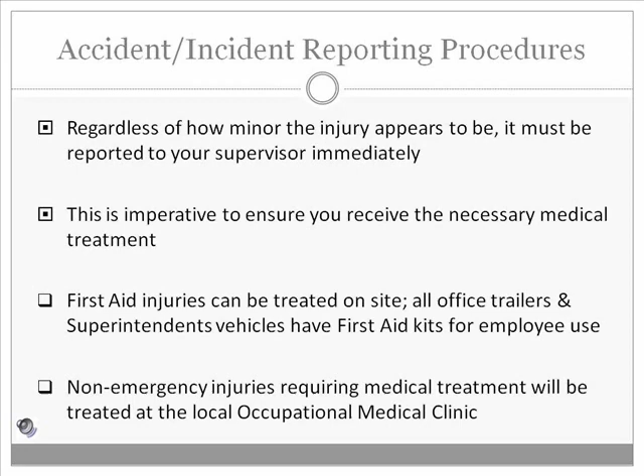Our drug and alcohol policy includes testing for pre-employment, post-accident, and reasonable suspicion. Violation of this policy may result in disciplinary action up to and including termination. Employees are prohibited from unlawfully manufacturing, distributing, dispensing, possessing, or using alcohol or controlled substances. This includes the misuse or abuse of prescription drugs. If the drugs are prescribed to someone other than you, they are viewed the same way as illegal narcotics.

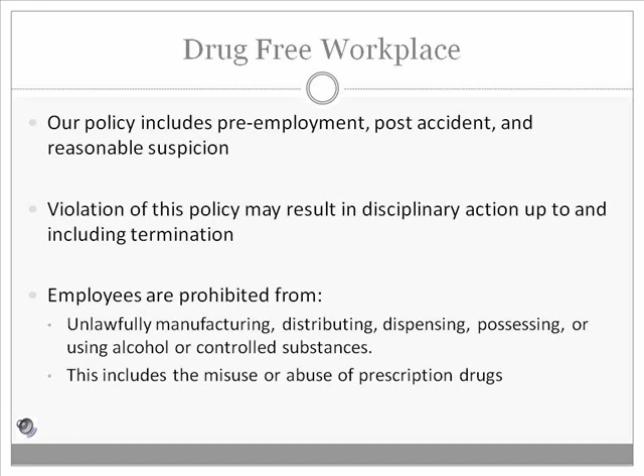Hard hats must be worn 100% of the time. The only exception to this is while you are inside the enclosed cab of equipment or inside a vehicle. The company-issued hard hat shall be worn. This will be issued to you on your first day of employment.

Do not alter the hard hat in any way. Hard hats are good for 5 years. The manufacturer's date can be found under the brim. Hard hat liners are good for 2 years and need to be inspected for damage or wear.

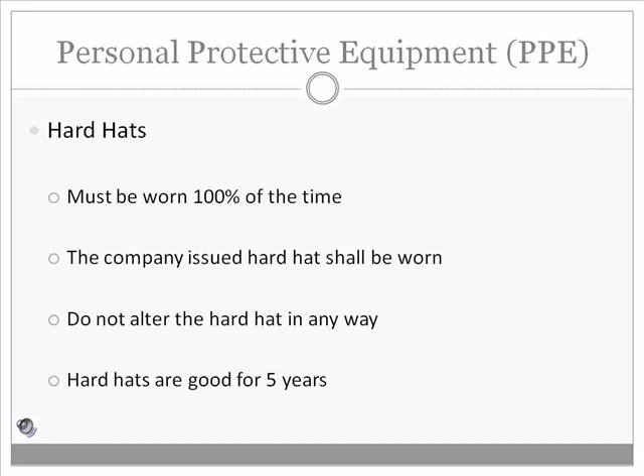Using the hollow space in the hard hat to store items is strictly prohibited, as well as extremely dangerous. This air gap is there to absorb the impact, and by putting something in that space, the protection of the hard hat is minimized. Wearing of baseball caps with buttons in the top or pins on it is also prohibited, as the pin will cause harm if the hard hat takes an impact.

Dust masks are provided for voluntary use as according to OSHA's Appendix D. Make sure to follow all provided manufacturer's instructions on how to use the masks. Keep clean and store properly. Dust masks are the only item we allow to be stored in the air gap or hollow space of the hard hats. This is because it keeps the masks clean and doesn't affect the hard hat's functionality. Dispose of masks when they are dirty, as they no longer stop particles and can affect airflow for breathing.

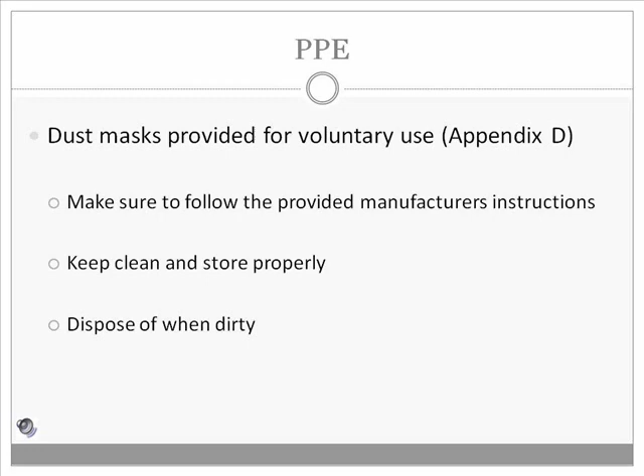Noise exposure over 85 decibels requires hearing protection. This is the level above which prolonged exposure will permanently damage your hearing. Most of the tools and equipment present on the sites operate at a volume of over 85 decibels. So hearing protection is recommended when working with or around equipment and machinery.

Employees are required to wear an over-the-ankle leather work boot. Some clients require hard-toe boots, depending on the job. We also require employees to wear long pants and a shirt with a sleeve of at least 4 inches. Save your shorts for the beach.

Safety glasses must be worn at all times when a hazard is present. Many people end up with objects in their eye simply by being near tools when they're being used, even if they aren't using the tools themselves.

Dark lenses are not to be worn inside of buildings or when dark. All eyewear must be Z87 approved, including prescription glasses. Z87 is the minimum protective standard required by OSHA. Side shields must be used with prescription glasses. In place of this, you must wear over-the-glasses glasses. If cutting or grinding, safety glasses must be used in addition to a safety face shield or a similar layer of protection.

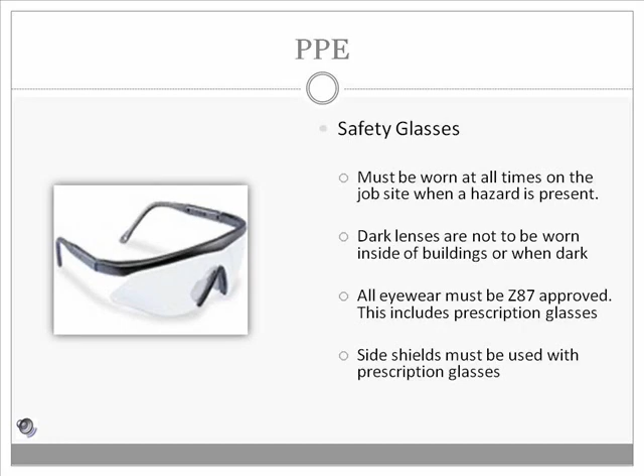Gloves are to be worn when handling materials. It is important to select the proper glove for the job being performed. We provide a variety of gloves for different purposes, such as rubber gloves for use with concrete and leather gloves for handling materials.

While performing hot work, a fire extinguisher must be readily accessible. Inspect the fire extinguisher before use. All our fire extinguishers are ABC type extinguishers, so they are useful for a variety of fires. This means you are able to use any extinguisher accessible rather than having to search for the right type. If the fire is too large to handle yourself, sound the alarm and evacuate the area immediately.

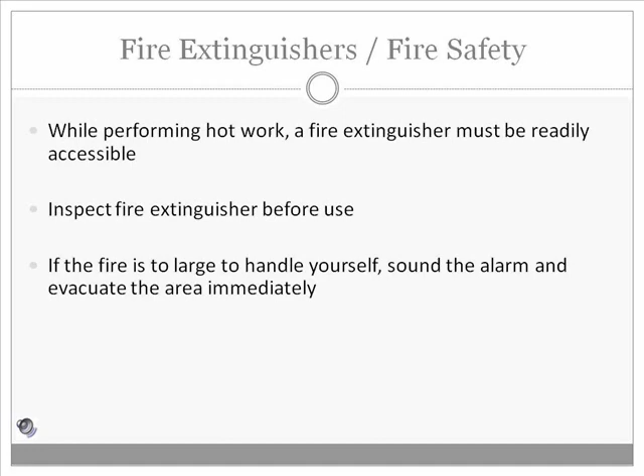Ensure the fire extinguisher has been inspected. Verify it has been inspected for the current month and is documented on the tag. Verify the pin is in place and the extinguisher has a full charge. Also, turn the extinguisher upside down and check to see if contents shift around. This ensures the contents aren't compacted at the bottom. If contents are compacted at the bottom, take a rubber mallet and tap the bottom of the extinguisher to loosen the contents.

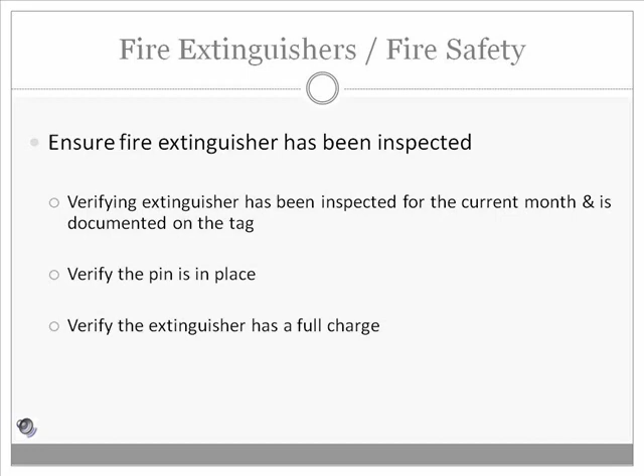We advise the use of the PASS technique: pull the pin, aim the nozzle, squeeze the handle, sweep the base of the fire. The reason for sweeping the base is to suffocate the fire by removing the oxygen. Without access to oxygen, the fire will die.

We follow a color coding system for our monthly inspections. This color code is used for ladders, both metal and fiberglass, power tools including cords and generators, fall protection, and lifting devices. All items need to be inspected daily as well as by those working with them, but monthly they need to be inspected and given the color for that month.

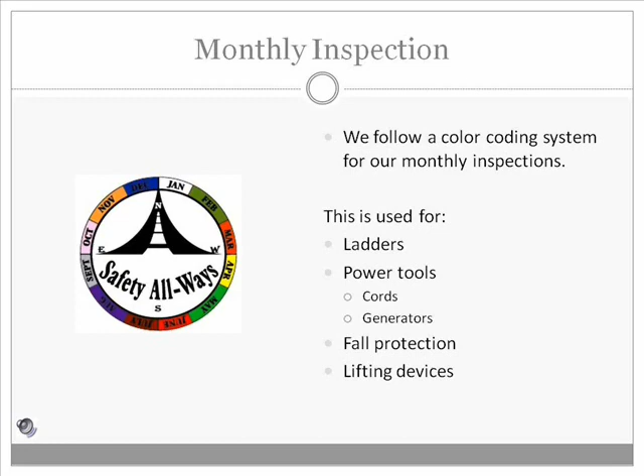Never join two ladders together to make a longer ladder. Check weight limitations of the ladder prior to use. Keep shoes free of mud and grease. Never hand carry materials or tools up a ladder; use a tag line to hoist them up. On equipment, place items on the step or fender above the ladder and then climb up. You must be able to maintain 3 points of contact at all times, including on ladders on equipment.

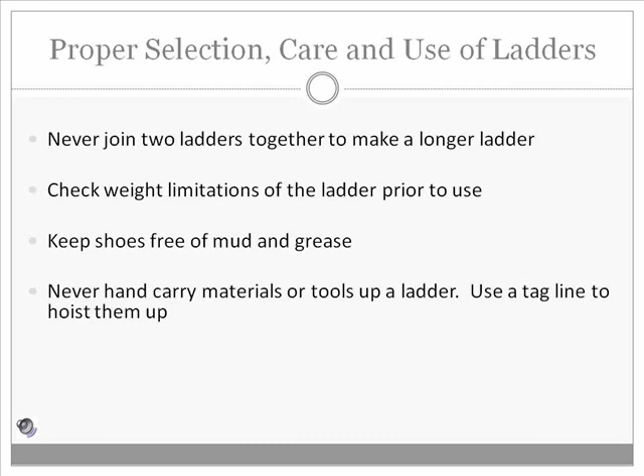Only one person at a time may work from a single ladder, unless it is designed otherwise. Inspect the ladder prior to use, and do not use an extension or step ladder if there is a missing, weakened, broken, or otherwise defective part. Tag it out of service and remove it from the work area. Metal and fiberglass ladders must be inspected and color-coded before being used. Wood ladders need to be inspected daily. Use caution when ladders are used in high-traffic areas.

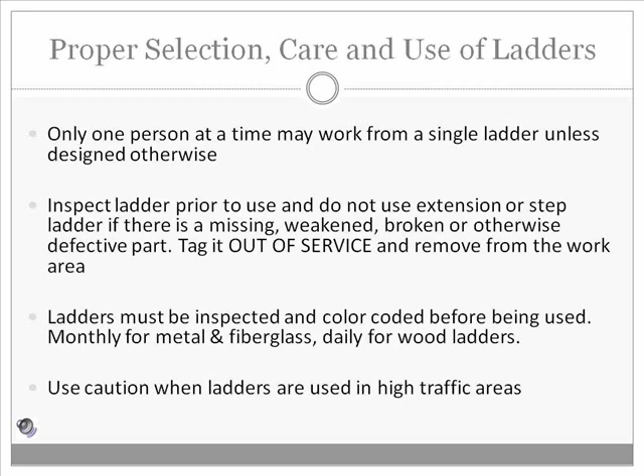Do not climb the back section of a step ladder. Keep the area around the base of the ladder free of clutter and materials. Step ladders shall not be used when leaned up against an object; the ladder must be completely opened up. Do not stand or sit on the top or the second rung of a step ladder.

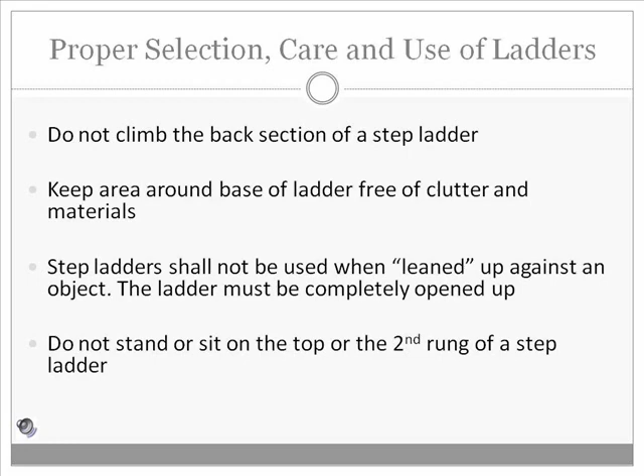Step ladders should be fully opened and the cross braces locked in place. Do not stand on top or next to the top rung. Do not walk ladders; climb down and move them to their new position. Walking ladders can warp the frame and reduce the structural integrity and weight capacity of the ladder.

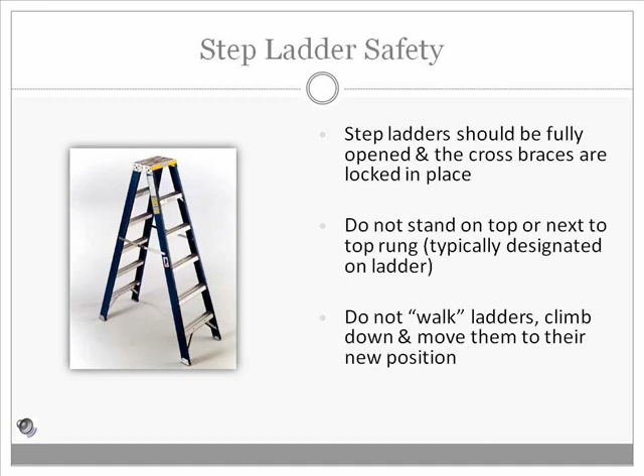Set up extension ladders at a 4-to-1 rise to run angle. If the wall is 20 feet high, the bottom of the ladder needs to be 5 feet out from the base of the wall. Secure ladders at the top and bottom. If the ladder is in a trench, bracing the base against the other wall of the trench is acceptable as securing it. The top of the ladder should extend a minimum of 3 feet above the ladder's landing.

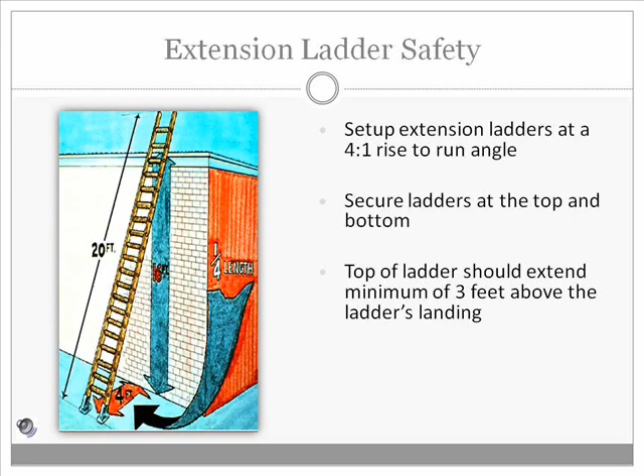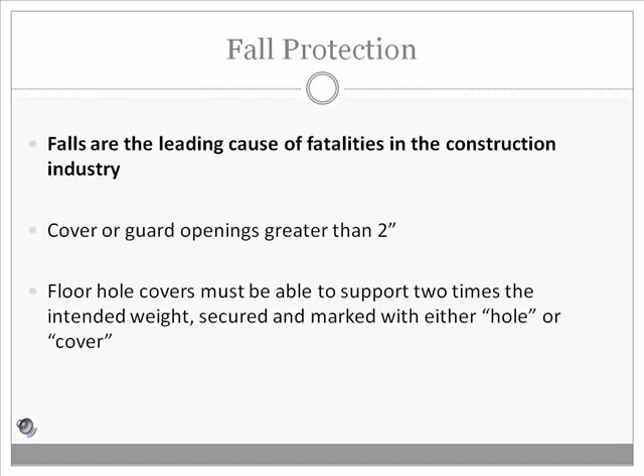Falls are the leading cause of fatalities in the construction industry. Cover or guard openings greater than 2 inches. Floor hole covers must be able to support 2 times the intended weight, secured and marked with either 'hole' or 'cover'.

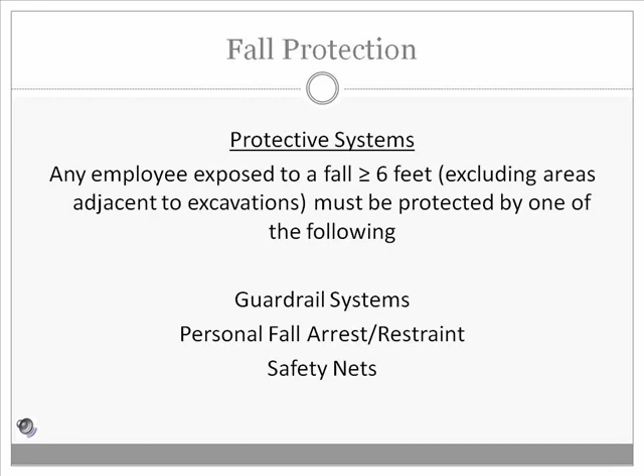Any employee exposed to a fall greater than 6 feet must be protected by one of the following: guardrail systems, personal fall arrest or restraint systems, or safety nets.

Inspect systems monthly and before each use for wear, damage, and other deterioration. Must have monthly color coding to show inspection has been completed. Remove systems and components from service immediately if they are defective or have been subjected to a fall impact.

Do not attach fall arrest systems to guardrail systems or hoists. These are not designed to support the force generated by a fall. In general, it is much better to use fall prevention systems such as guardrails than fall protection systems such as fall arrest devices, because they provide more positive safety means.

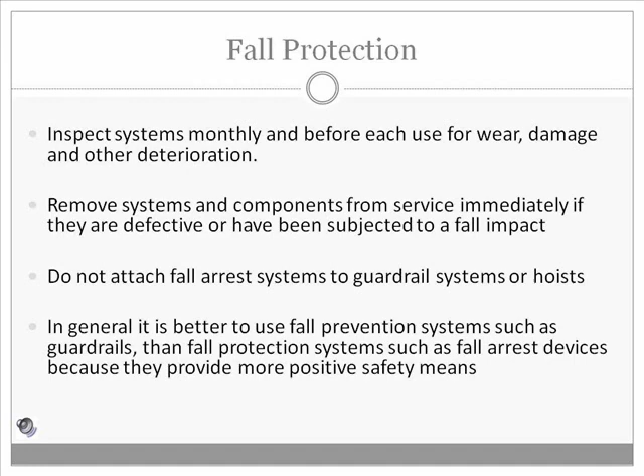Anchorage points must be independent of an anchorage that is also being used to support or suspend a platform, and must be capable of supporting at least 5,000 pounds per employee.

When using a lanyard, retractable, or restraint, always choose an anchorage point overhead. Check manufacturer specifications as to whether or not a lanyard is a tie-back lanyard. If it is not made specifically for use as a tie-back lanyard, do not attempt to use it as one under any circumstance.

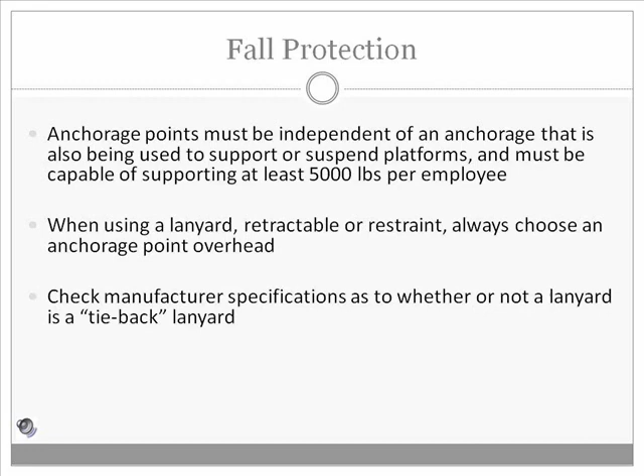Typical components of a fall arrest system are: body harness, a lanyard or vertical lifeline which must be shock absorbing, dual-legged lanyard to ensure 100% tie-off, a retractable lifeline or yo-yo, a horizontal lifeline which must be engineered, or restraints.

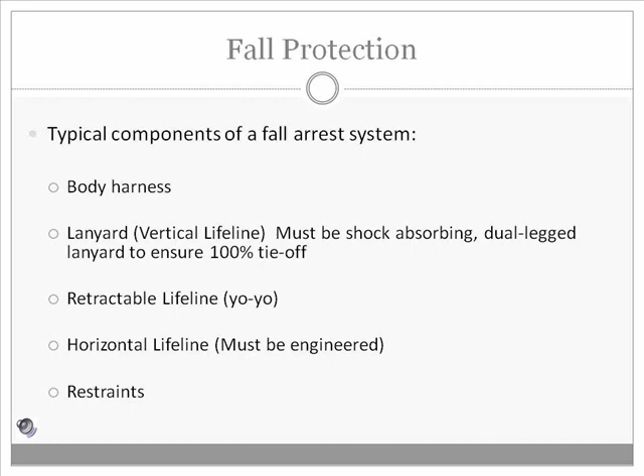This illustration shows the distance a person would fall if they were tied off above their head with a 6-foot lanyard. When you add the lanyard length to the length of the deceleration device, the distance from the D-ring to the worker's feet, and add some stretch factor, the distance the worker will fall is almost 18 feet.

This is important to consider when many of the heights employees work at are less than 18 feet, but over the 6-foot minimum that requires fall protection. This situation would require other types of fall protection, such as retractable fall protection or yo-yos.

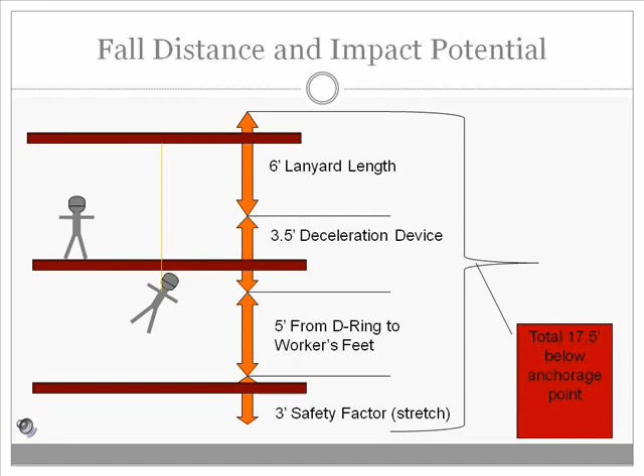Back injuries are one of the leading injuries in the construction industry, and most of them are easily preventable by using proper planning and techniques. It is important to remember to never lift items that are too heavy, to always get help, and have a plan before you lift.

The proper positioning and technique that will save you from back injury is as follows: keep your knees bent and your back straight, keep the load close, and do not twist.

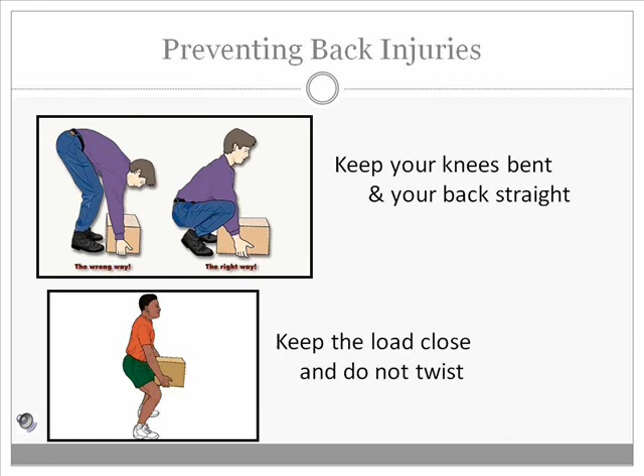Rather than putting stress on your back, use mechanical lifting devices when possible. Examples of lifting devices are hoists, cranes, hand truck, come-along, and forklift.

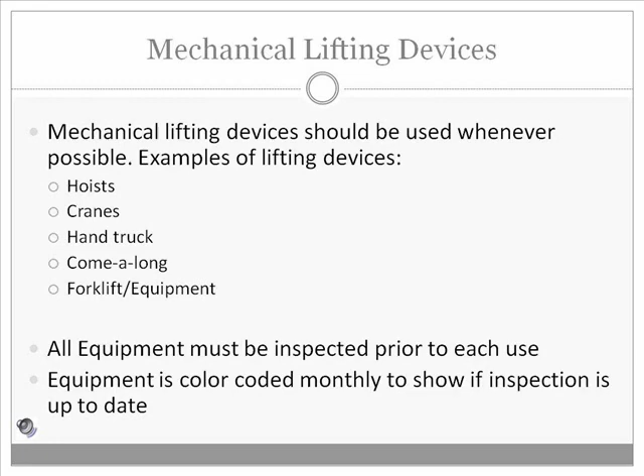All equipment must be inspected prior to each use. Equipment is color-coded monthly to show inspection is up to date. Inspect all tools monthly and prior to use. Tools cannot be used if they have not been inspected and color-coded for that month.

Tag out damaged and faulty electrical equipment and remove it from service immediately. Only use GFCI protected electrical sources on construction sites. Tools without a ground plug must be double insulated.

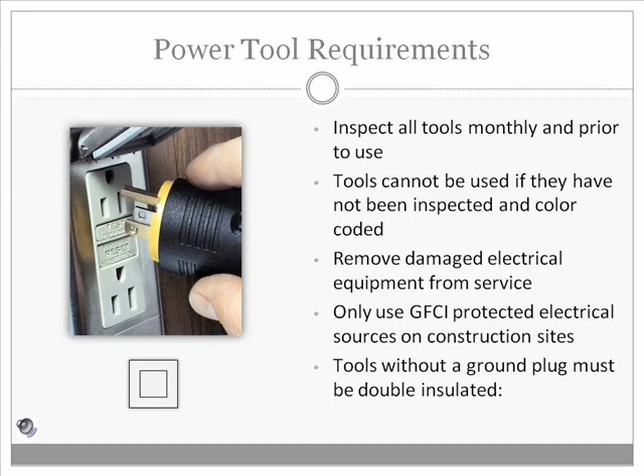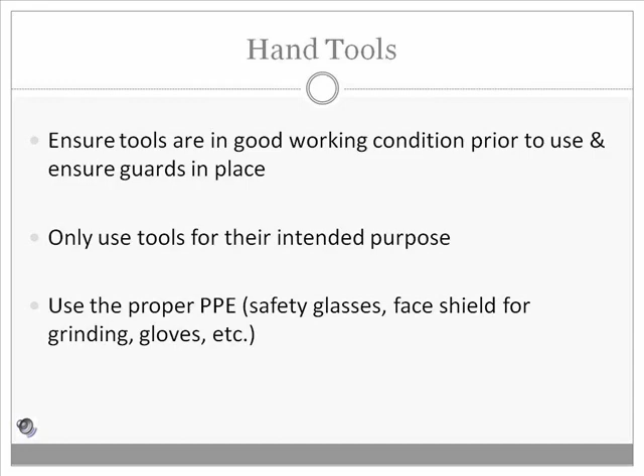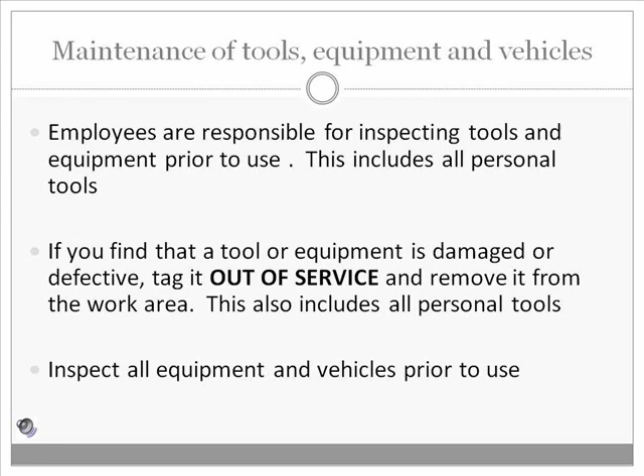All equipment and vehicles must be inspected prior to use. Many injuries occur due to poor housekeeping. To prevent this, employees must clean up their work area as the day progresses. Protect yourself and others by keeping a neat and organized work area. A clean work site is a safe work site.

The following areas need to remain free from obstruction: aisles, exits, fire extinguishers, emergency equipment, and all electrical controls and switches.

Only use properly rated rigging equipment. In the case of chains, only grade 80 and grade 100 are to be used for lifting. Anything less is a transport chain, useful only for tying things down, not for lifting.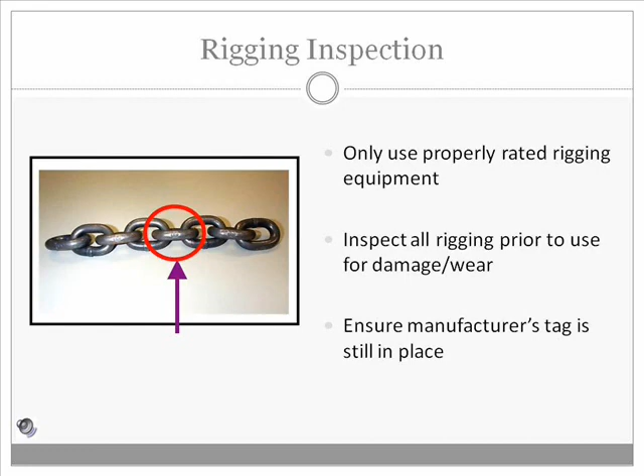Inspect all rigging prior to use for damage or wear. Look for cracked, stretched, or bent links on chains. Ensure the manufacturer's tag is still in place. If rigging equipment is damaged or faulty, or if the manufacturer's tag is gone, remove it from service immediately.

In the case of synthetic or nylon slings, look for acid or caustic burns, melting or charring of any part, snags, punctures, tears, or cuts, broken or worn stitches, and distortion of fittings. If any of these are present, remove the sling from service.

When using slings, protect from sharp edges of the load by placing pads over the sharp edges, and do not place your hands between the sling and its load when the sling is being tightened around the load. When rigging with a synthetic sling, always put the tag towards the hook so the tag can still be read.

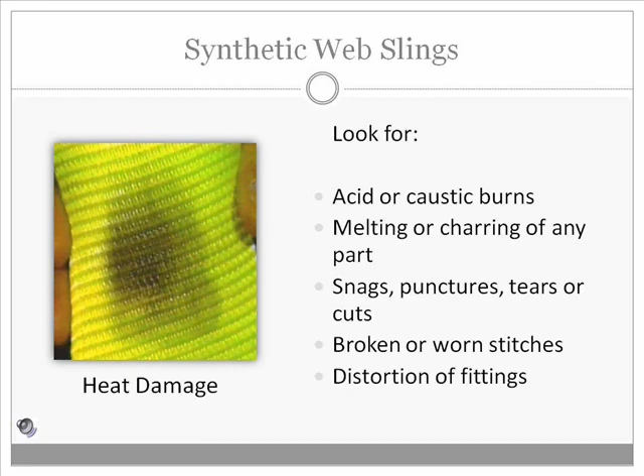It is your right to know what chemicals or materials you are working with. The purpose of HAZCOM is to prevent the occurrence of work-related illnesses and injuries caused by chemicals. It is your right to know of any hazardous chemicals or materials that you are working with or around. You should know the location of the Material Safety Data Sheet, MSDS, book, and the written HAZCOM program. All of the job site trailers contain MSDS books and the information for 3E Company, the third-party MSDS provider.

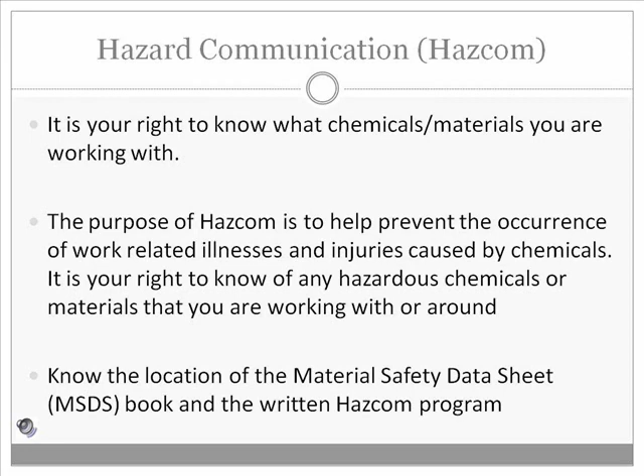MSDS sheets are documents provided by the supplier of a chemical, and they contain manufacturing company information, hazardous ingredients, physical data, fire and explosion data, health hazard information, reactivity data, spill, leak, and disposal procedures, special protection information or PPE, and special precautions.

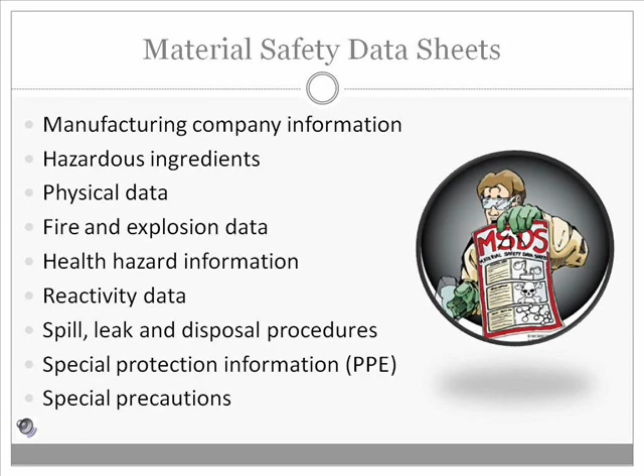The other part of the HAZCOM program is that all containers must be labeled. All chemical containers must be labeled to identify contents and hazards. Most labels use colors to represent the type of hazard posed by the contents of the container, and numbers to indicate the level of hazard.

Fire has a red color, health has a blue color, reactivity has a yellow color. The number is used to indicate the degree of hazard, ranging from 0 being minimal hazard to 4 being a serious hazard.

Always be aware of chemicals other trades are using in your work area. Feel free to ask. Information and training shall be received anytime a new hazardous chemical is introduced into your work area. Always check containers for labels, and remember that secondary containers must be labeled with the chemical name and hazards. Notify your supervisor of any unlabeled chemical containers.

Employees must take ownership of the project's safety. When you see a hazard on the job, you need to correct the problem or report it to your supervisor. Always inspect the work area before work begins to recognize the hazards in your work area, like overhead loads, falling objects, pinch points, etc. When you are asked who is responsible for safety, the answer is, I am.

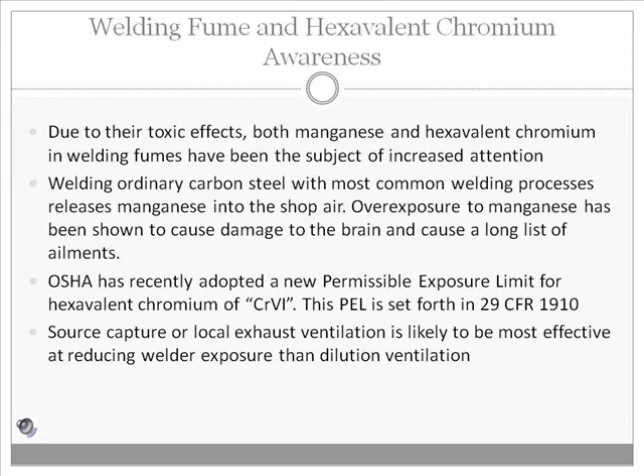Do not remove guarding unless lockout/tagout has been performed. All guards must remain in place during the operation of machinery. Inspect all guarding before operating machinery. All damaged guarding must be replaced.

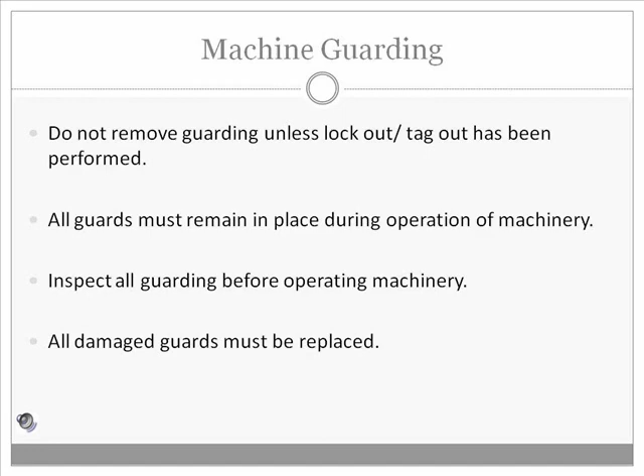Machinery or equipment cannot be operated if guards or other safety devices are broken or missing. If this is the case, the machinery or equipment is required to be tagged out until the guard or device is fixed and returned.

Lockout/tagout are techniques used to prevent the release of hazardous energy, or to prevent hazardous energy from escaping. A padlock is placed on the appropriate energy isolating device that is in the off or closed position.

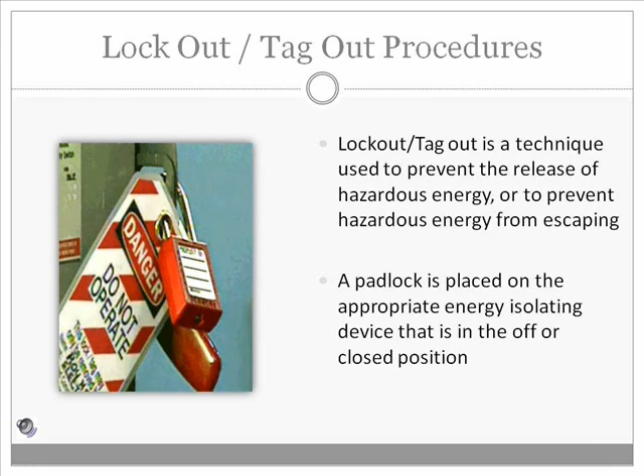Lockout/tagout addresses the fatal five main causes in workplace injuries. These are failure to stop equipment, failure to disconnect from the power source, failure to dissipate, bleed, or neutralize residual energy, accidental restarting of equipment, and failure to clear work areas before restarting.

A separate training class is given on lockout/tagout. Never attempt lockout/tagout unless you have been trained. Never loan or share your lock or key with anyone else. Always be sure all lockout/tagout devices are compatible with the environment in which they will be used. For example, do not use a paper tag somewhere where it will be exposed to the weather.

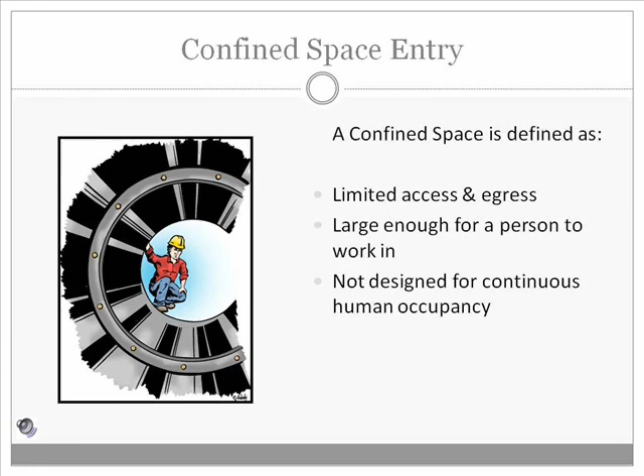A confined space is defined as having limited access and egress, being large enough for a person to work in, and not designed for continuous human occupancy. Some examples of confined space are tanks, vaults, manholes, and pits.

A confined space is considered permit required if any of the following are true: it contains or has a potential to contain a hazardous atmosphere; it contains a material that has the potential for engulfing an entrant; it has an internal configuration such that an entrant could be trapped or asphyxiated by inwardly converging walls or by a floor which slopes downward and tapers to a smaller cross-section; or it contains any other recognized serious safety or health hazard.

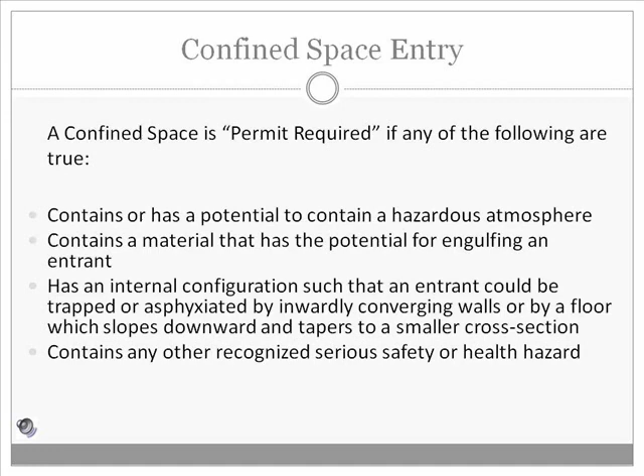Common confined space hazards include, but are not limited to, oxygen levels outside of the acceptable range of 19.5% to 23.5%, flammable or explosive gases such as methane, toxics such as hydrogen sulfide or carbon monoxide, physical hazards such as flooding, caving in, collapsing overhead loads, etc., biological hazards such as hepatitis, and any unknown hazards that may also exist.

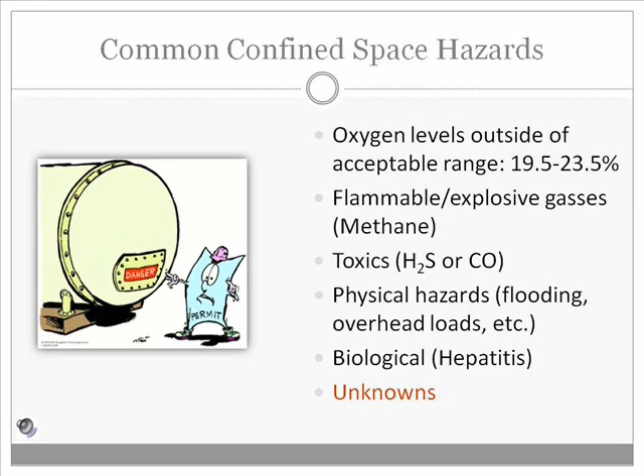Test internal atmosphere before entering a confined space. Test at different levels, working from the top down, testing every 4 feet. Document the results on the confined space permit.

Scaffolds are inspected and tagged daily and assigned 3 different colors: green, yellow, and red. Green indicates all clear. Yellow indicates that hazards are present; recognize the hazards and proceed with caution. Red means no entry. Training on scaffold safety will advise you on how to protect yourself from electrical hazards, fall hazards, and falling object hazards.

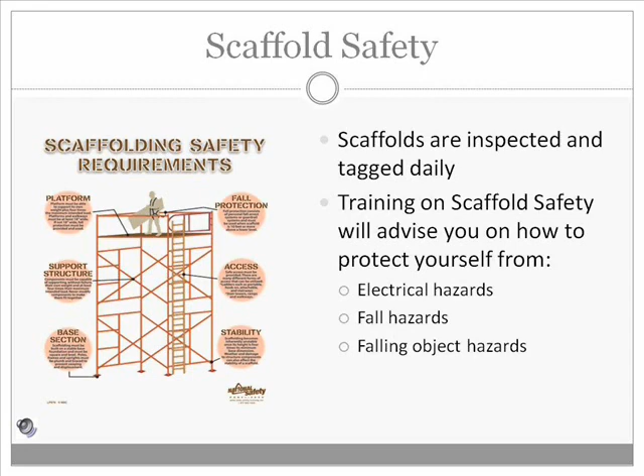Electrical hazards: maintaining clearance between scaffold equipment and power lines is crucial to worker safety. Safe distance must be kept between energized power lines and any conductive material on the scaffolding. This clearance must be maintained when scaffolds are erected, used, dismantled, altered, or moved.

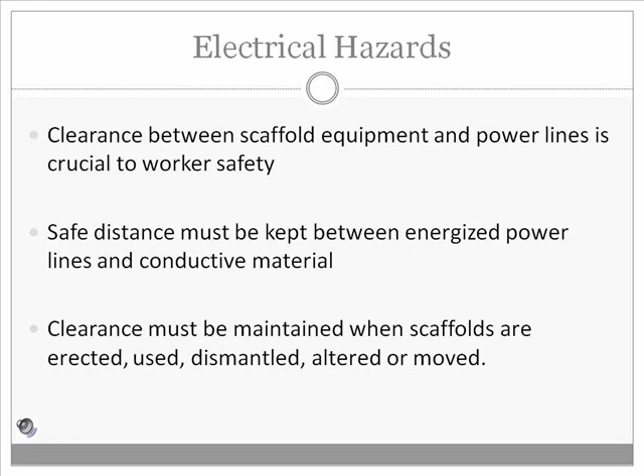Each employee on a scaffold more than 10 feet above a lower level must be protected from falling to that lower level. This is an exception to the usual requirement that workers exposed to a 6-foot or more fall require fall protection, as it allows fall protection to be installed as scaffolding is being erected. The 2 types of fall protection are personal fall arrest systems and guardrail systems. Different types of scaffolds require different types of fall protection.

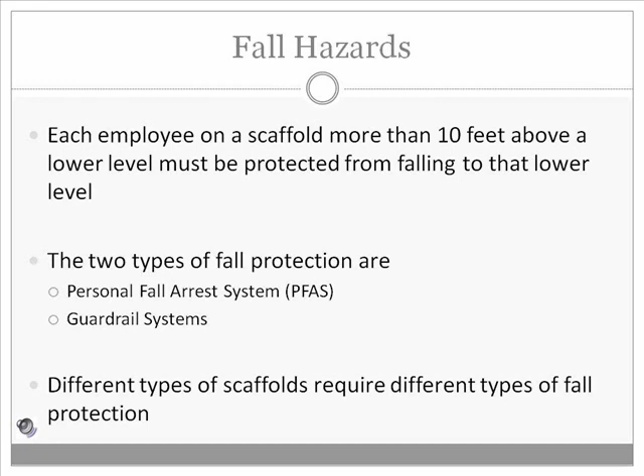Employees must be protected from falling hand tools, debris, and other small objects. Protection is gained through installation of toe boards, screens, guardrail systems, debris nets, catch platforms, canopy platforms, and canopy structures that contain or deflect falling objects, and by roping off or blocking off areas underneath scaffolding.

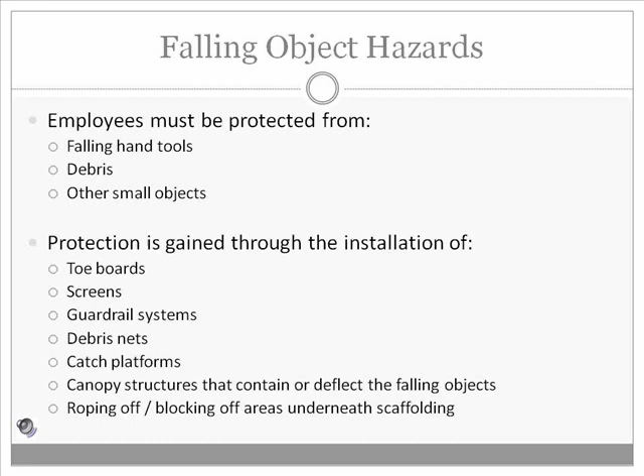Never operate equipment without proper training. Seatbelts must be worn at all times. Maintain eye contact with all workers on the ground. Complete daily equipment inspection pre- and post-shift. Check backup alarms, glass, mirrors, and guards, and notify the supervisor of any defects needing repair. Maintain 3 points of contact on ladders while entering and exiting equipment. No riders on equipment, no exceptions.

All employees who operate forklifts will be trained by an authorized instructor. This training must be updated every 3 years.

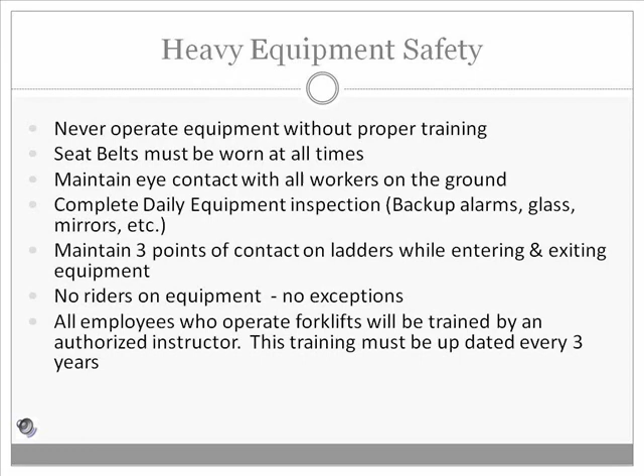One of the serious exposures to injury is working in trenches. Prior to digging, ensure all utilities are properly marked and located. This includes Bluestake confirmation and potholing of utilities. Pothole utilities by hand or vac truck—it is not considered potholing if you are using a backhoe or a track hoe. Trenches will be inspected by the competent person daily, prior to work and when conditions change.

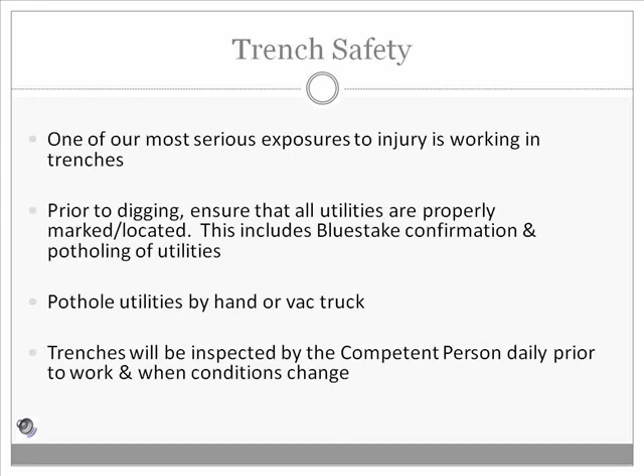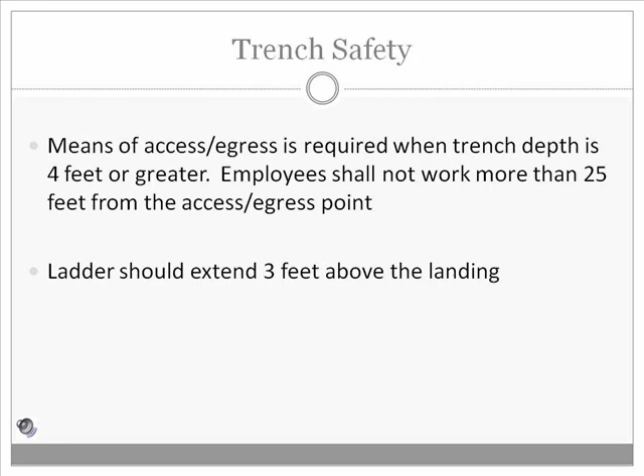Means of access/egress is required when trench depth is 4 feet or greater. Employees shall not work more than 25 feet from the access egress point, meaning an access point or ladder is required every 50 feet. Ladders should extend 3 feet above the landing.

Trenches greater than or equal to 5 feet in depth must be protected with one of the following protective systems: sloping, benching, shoring, or shielding.

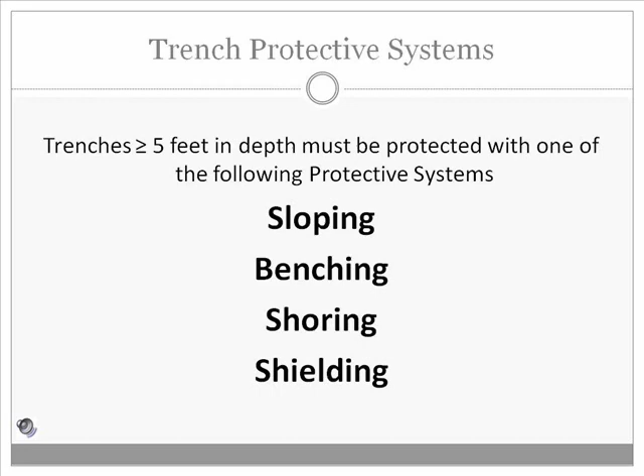Different grades of soil require different amounts of sloping. The competent person will carry out testing to determine the soil type. The majority of Arizona soils are type C, which means that because they are so granular and coarse, they must be sloped at more of an angle. This type of soil cannot be benched. Spoil piles should be at least 2 feet back from the edge of the trench to allow a walkway or access path to run alongside the edge of the trench. This 2-foot distance back from the edge applies to generators and tools as well.

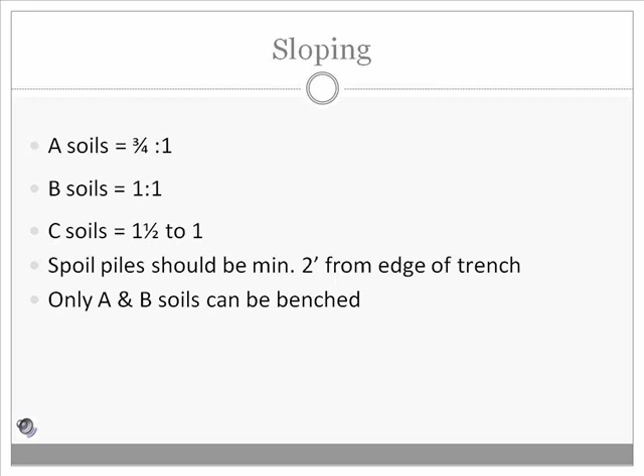Job safety analysis. JSAs are important because safety planning is critical. One can plan work and leave safety out; however, one cannot plan safety and leave work out. Hazard analysis is done prior to beginning work.